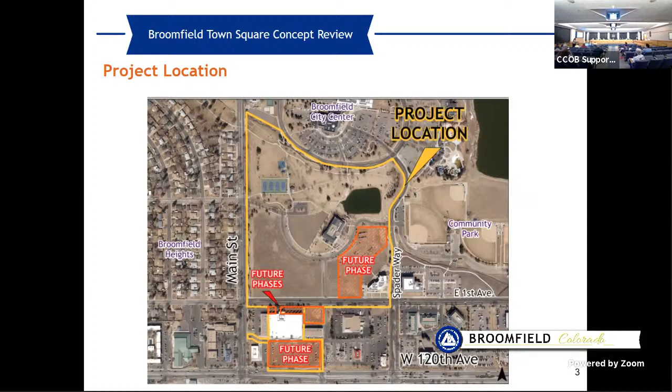Next slide, please. Oh, I'm sorry, before I go on, the future phases are highlighted in the hatching and the orange, big orange labels. Next slide, please.

So the properties are collectively zoned PUD for town center or civic center and retail. The comprehensive plan vision for the area has long anticipated a civic center, and what we refer to now as the Broomfield Town Square. A comprehensive plan land use map amendment is required to align the land use plan with the overarching goal to create a town square.

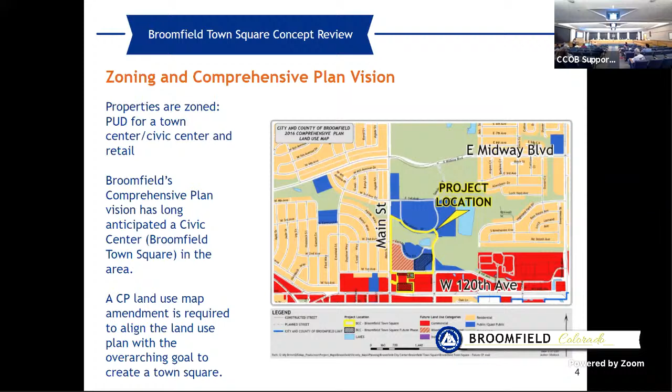Next slide, please. So this map is provided for a little bit of background and context on the project. In May of 2020, our development partner, the Broomfield Town Square Alliance, presented a concept plan for the initial phases of the proposed development. The prior concept focused around a highly amenitized plaza north of East First Avenue and an enlarged lake with a trail around the perimeter.

Amenitized public spaces were depicted along the way, conceived to promote gathering for passive and active purposes, enjoying the energy through the retail, dining, and innovative workplace offerings, and for lingering, such as strolling around the lake and discovering points of interest. This plan depicted 3 mixed-use buildings framing the public plaza just north of East First Avenue and around that southern end of the lake, that narrow part.

In this initial concept plan, townhomes are shown fronting the east side of Main Street. South of East First Avenue, we see the plans showing the reimagination of the Safeway building as a market hall.

The prior concept plan included 483 residential units, including one building intended for age-targeted or senior living. The development agreement for the property includes an affordable housing requirement that 20% of the units will be provided on site as affordable, or in the alternative as a cash in lieu fee.

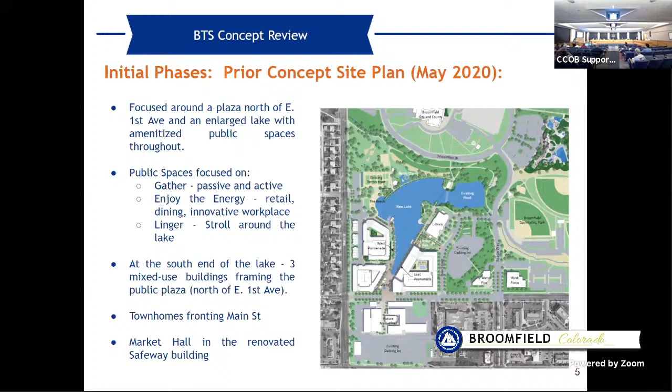Transitioning to the current application for concept plan review, this plan builds on the prior 2020 concept to show the locations, the proposed future phases outlined in magenta. This plan is the primary focus of consideration this evening. The proposal is for approximately 327 potential residential units spread over 2 to 3 new buildings, including one north of East First Avenue.

All of the larger buildings would integrate structured parking within the buildings, and our development partners will speak further to the details and show some newly developed renderings for the future phase as part of their presentation.

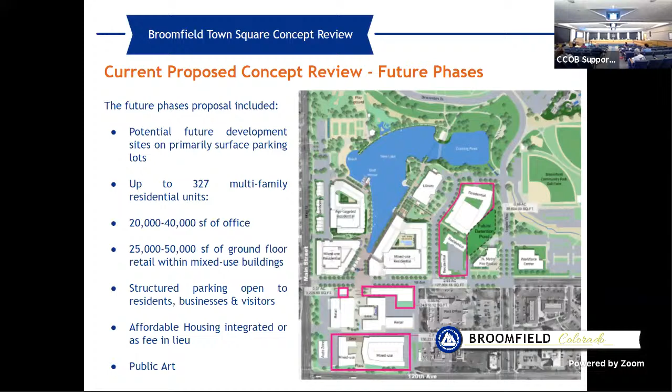Next slide, please. Before I turn it over to Joe Vostris, I would note that the public notice requirements have been met for this public meeting, with signs posted on the property, notices mailed to property owners. We've added a post to Nextdoor, and of course we have a Broomfield Voice page.

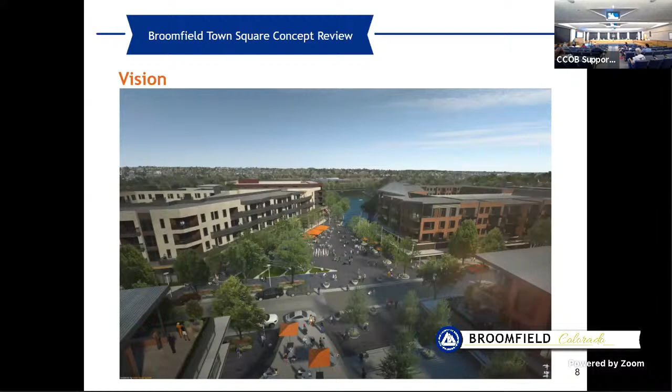So I thought we'd start with just a little bit of quick background. Many of you have heard some of what I'm going to say before, but some of you may not. So let's move to the next slide. Actually, do we have the slide that has the guiding principles? I think this one might be a little more helpful.

When we very first got invited to work on this project, we did a very deep dive with the community, where we engaged a whole bunch of residents, business owners, a variety of stakeholders, and we spent hours and hours with these folks. We did surveys, we did visual preference studies. We really delved very deep into the needs and desires that the community had for this project. And what came out of that was a set of guiding principles as well as some uses.

But along with that was the idea that there would be this traditional town square, a gathering place for residents to just come, see each other, and really feel like their community had a distinctive place and a heart, a real 'there.' And of course, it had to interconnect with the neighborhoods and the paths and the bike paths, and really have it firmly knitted into the neighborhood. Along with that was the encouraged healthy lifestyle, the pedestrian nature of it, the lingering and walking around.

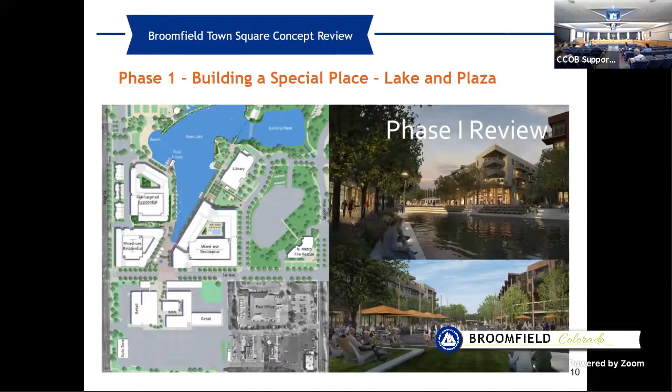Let's go to the next slide. Actually, before we talk about this one, I think one of the topics that has come up is why the lake.

We've had a number of people say, well, why the lake? Why is there a lake here? The lake is the keystone that holds this whole project together, and I just want to be super clear about that. As we struggled to figure out how to make this thing work, this is not a superb retail location—it had a lot of challenges, and our team was really intimidated by what we got out of the focus groups. How are we going to make this a reality, and how are we going to make it financially sustainable, so that it can last for 100 years and be a financially sustainable project?

Huge challenges in a tough location. This is not a traditional retail location. So as we had to solve for that problem, as well as make sure we checked all the boxes from the public's desires for the project, we again put that out to the design competition. When we saw the design competition and that the lake was set in the center of this, the light bulb just went off, and we said, this is the missing piece of the puzzle.

Because with this, we create an amazing place where the stickiness, the strolling, can really take place. Recreation can take place in a very special way that would be difficult to duplicate. We're giving our local tenants that we want here waterfront real estate, for crying out loud—that really helps them be successful in the long run. And also in the residential, many of these residential units are going to have water and mountain views. So it really boosted the project in terms of making sure that it not only met all the criteria we'd laid out for it, but gave us confidence this would be a financially viable, sustainable project.

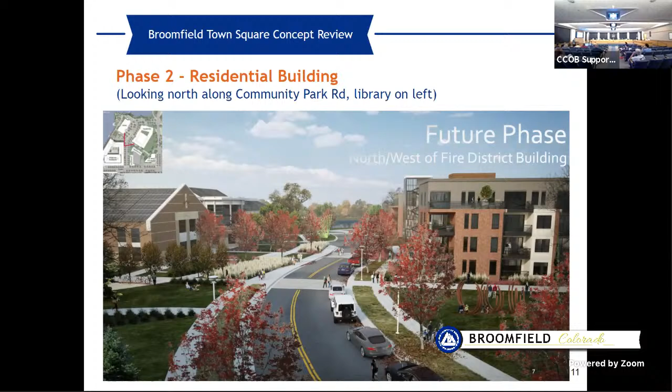The parking lot in front of the Safeway building posed a real challenge to us. As we think about the market hall and phase one of the project, our project is spaced on 120th with a gigantic asphalt parking lot, just a sea of asphalt out there. Not what you really want for your downtown and town square experience that we've been working on.

There were a few things we really wanted to accomplish from the original checklist, and one was to have all the retail that was desired. Phase one checks the boxes in terms of boutiques and food and beverage, but there were a lot of services and other uses that were desired that we want to make sure we'd eventually have room for. This will help do that.

It will really extend this pedestrian experience in a special way as it relates to art, which we're going to talk about more in a minute. But what you see here are these mixed-use buildings. The one on the left potentially could be a hotel under what we propose. Obviously, no decision has been made on that at this point since it's conceptual. But the idea is creating this incredible doorway and grand entrance, if you will, to the entire project.

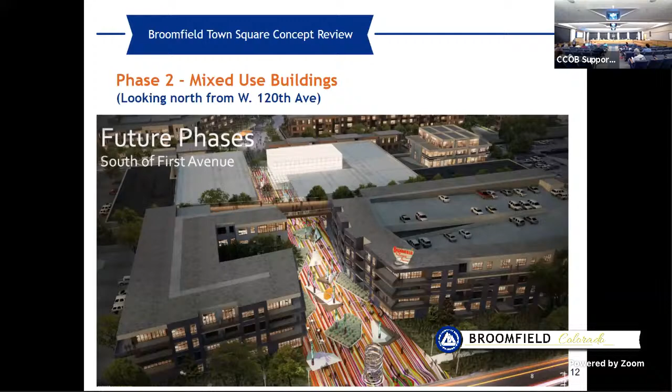Let's see, next slide.

So wanted to talk a little bit about art. Art was identified early on in all the outreach and focus groups we did as an essential part of this project. For us, that was more than a few pieces of public art scattered around. It was really wanting to infuse the entire project with art as part of the overall experience, and have it be dynamic enough that it's something you return for again and again. It changes, becomes a palette or canvas, and you can choose from a palette of programming and objects to keep it relevant and fresh and stimulating basically forever.

So these are just some inspirational images to look at, to think about how color and creative use of the surfaces, things overhead, all the opportunities we're going to have with what's been designed. We are planning a very significant budget for the acquisition of public art, and want the feeling of art, the whole project, to just be imbued with art as you move throughout it.

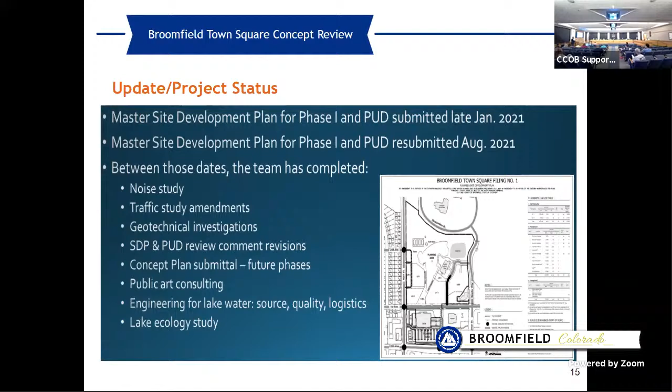The future phases that Joe just spoke about have not been submitted on a site plan. That submittal will take additional studies, parking studies, traffic studies, and drainage studies. Those will come in future years and will require a proper community engagement process, as our first phase has gone through over the past several years.

Next slide, please. Here's a quick cost overview. We've got some new faces in the room. What is this project? We have the first phase, which is what we submitted, and what we've been working on for the past few years. And you have future phases. The lake itself has a lot of components.

There's not a lake, there's something else there. So in that lake number, you're going to have benches, hardscape, just general grading throughout the site, and relocation of existing utilities, no matter what we do here. There are things that are there that need to be moved. All told, it's hard to perfectly quantify, but we think it's well over, perhaps up to, $6 million on the lake and the lake area, which again is over 5 acres of land.

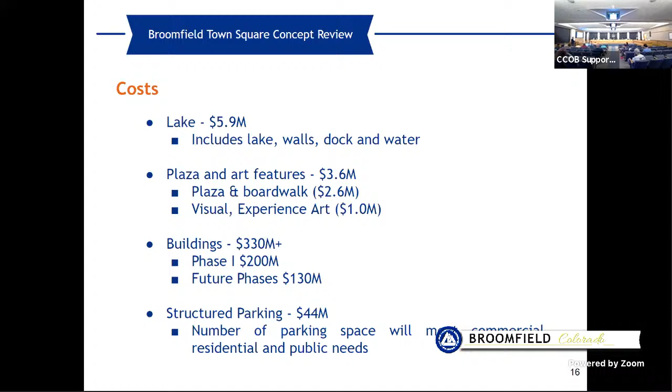Looking forward to next steps: we are currently, in the top row, completing studies, entitlement, and land use applications. We think that continues through the remainder of this year, moving into next year, provided we make it to the next step. It then goes into vertical construction documents once we receive approval on our land use application, moving on to the heavy engineering, architecture, and vertical construction.

That includes over 300 units of apartments, over 160 units of age-restricted housing, as well as the repurposed Safeway building, which will total over 50,000 square feet, not including all the site infrastructure, lake engineering, etc. We are continuing to work on that. It's full bore, and that's again the focus of our efforts this year.

We are still targeting end of next year for closing of our capital, including bond finance and vertical construction finance, and commencement of construction. First comes heavy engineering: grading, soil export, site utilities, the deep utilities, the dry utilities. So you're going to see a lot of heavy movers for those first few months, with site mobilization, stormwater work, etc.

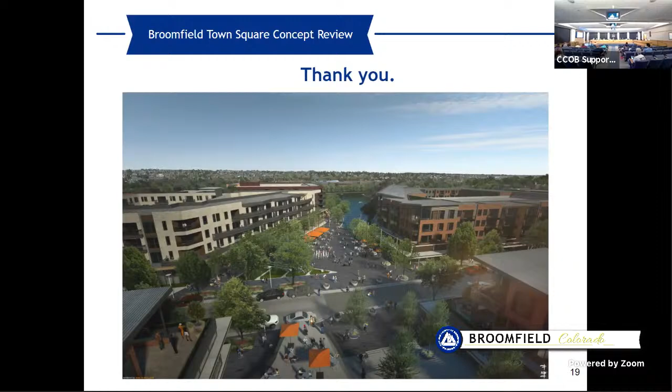Awesome. Thank you for the presentation, Joe, Tim, and Thunder. I had to get that in there. So yeah, we'll start with our comments. We appreciate the presentation so far.

We'll start with the land use review. Are there any members of our land use review commission who would like to comment on this proposal?

Thank you. Earl Franz, land use review commission. First of all, I just have to give a compliment with the design and layout and what they've done with this plan, going through focus groups and modifying and improving it. Incredible. Several years ago, I saw a PowerPoint presentation which was the initial concept, and it just blew me away. I thought, well, when this is complete, I'm going to sell my house, sell my car, buy a condo here, there's public transportation, this is where I want to live. That becomes a dream, it's in your mind, you just keep thinking about it.

But if I'm correct, in 2024 there'll be 810 residential apartments in phase 1 and phase 2 together, and 12 for-sale condos or townhouses, which is 1.5% of the units, and that doesn't include 10% for-sale affordable housing units.

Again, I'm speaking for myself, but not my fellow geezers. But that's not enough for sale units. People would like to maybe take some equity, buy something that they could use again. A couple examples they had in their portfolio was Eastbridge Town Center in Stapleton, and Old Town Fort Collins.